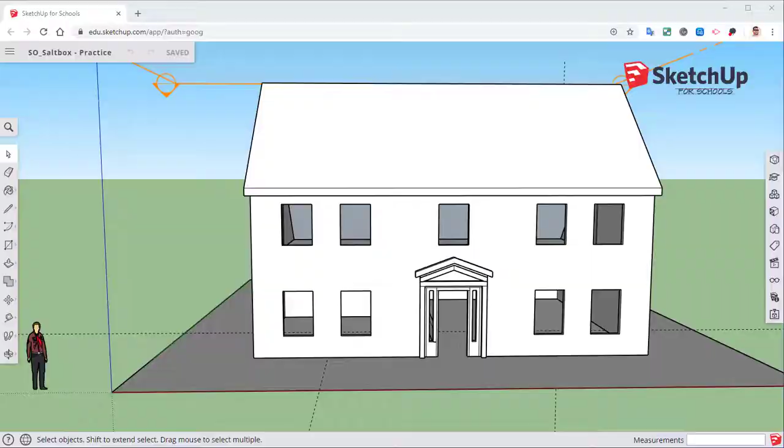Welcome back to our SketchUp for Schools project. We are still working on our Saltbox house. This is where we are currently at with our project. In our last video, we went in here and polished up the roof a little bit.

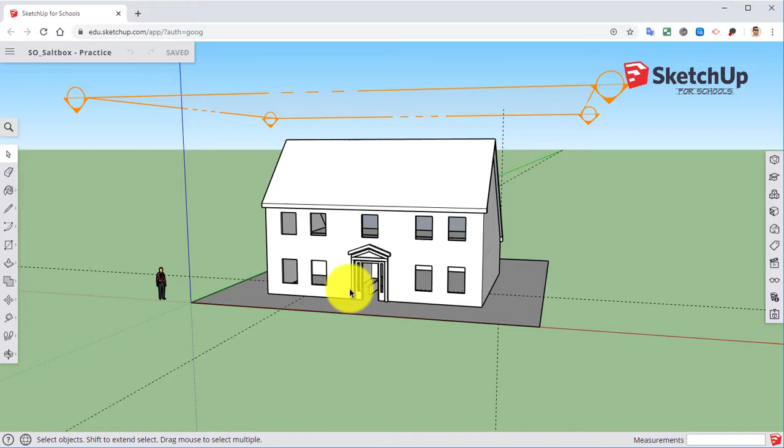We currently have our front door. However, we are missing two other doors, one over here on the side going into the mudroom behind the master suite, and then one in the very back that goes into the dining room, which is a big double door. That's what we're going to work on today.

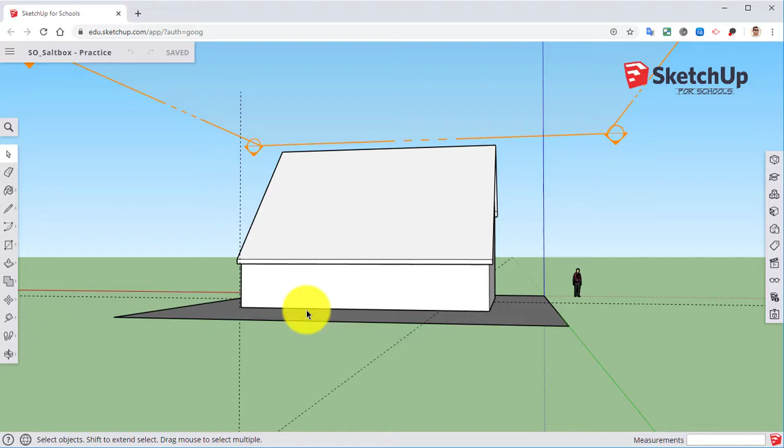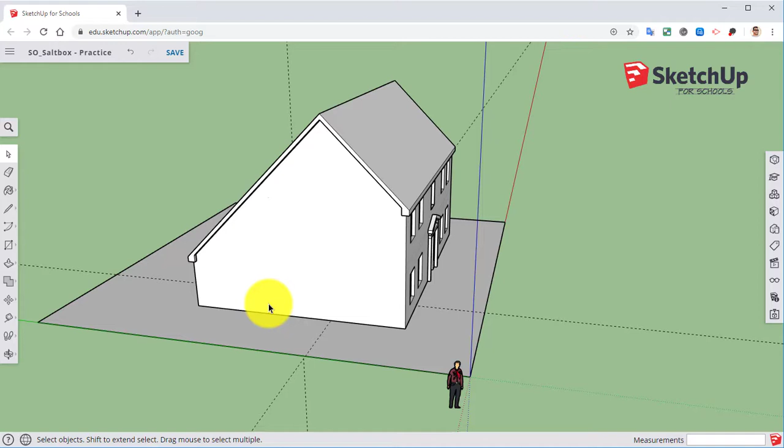I already have my measurement for the outside, but this house is very symmetric, and a lot of these doors are centered on the walls. If you need to do that on your own, you'd come in here with the section plane tool, create the section plane, push it through, and get the center for the door. I'll show you how to do that here in the back of the house.

But for over here, we're going to right click, edit component, and right click again. You see I have my dotted lines, or dots, so that way I know I'm actually inside this group or component, which is what we need to start with.

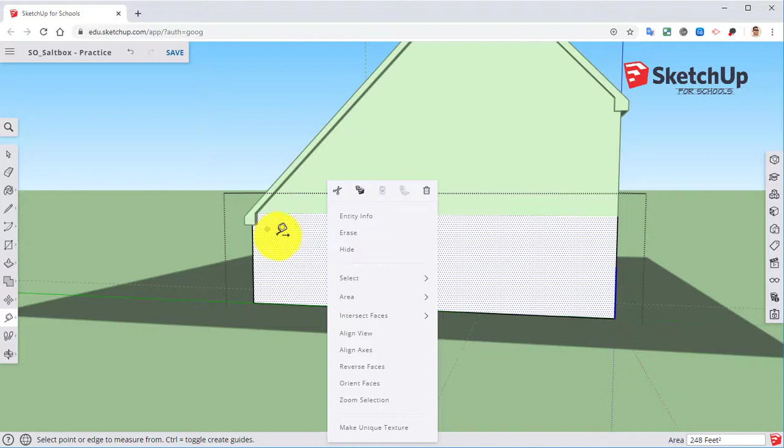I'm going to take my tape measure from the far left, go right, go 6 foot 1 inch. That's going to be the center of my door.

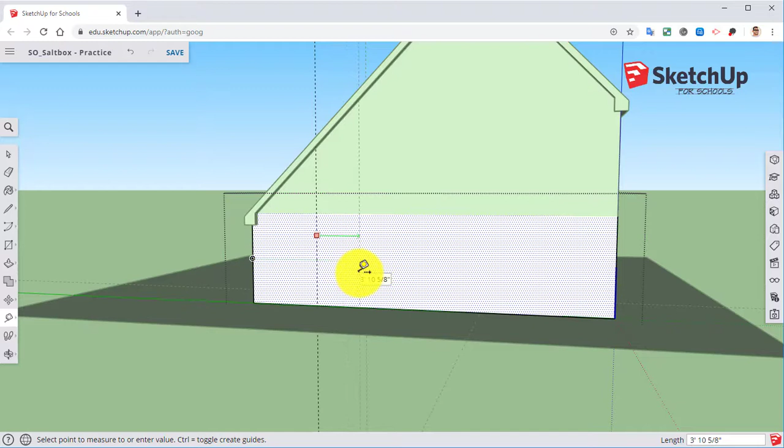This is just a 3 foot wide door, so I'm going to go from the center to the right, make sure that my line is green, type in 1 foot 6 inches, go from the other side. Make sure you don't drag it from the center, because it tends to glitch out for whatever reason.

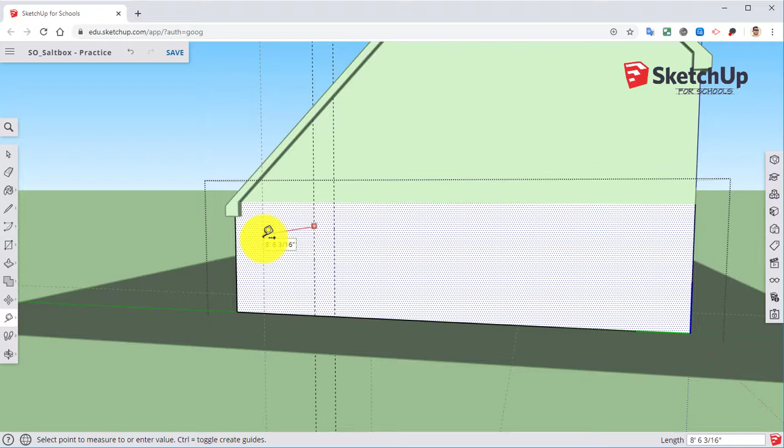It will not create a guide most of the time, so go up here, somewhere off the center, click, go, make sure it's again red. This is going towards me, so it's not going along the wall, be aware of that. Make sure it's green, 1 foot 6 inches.

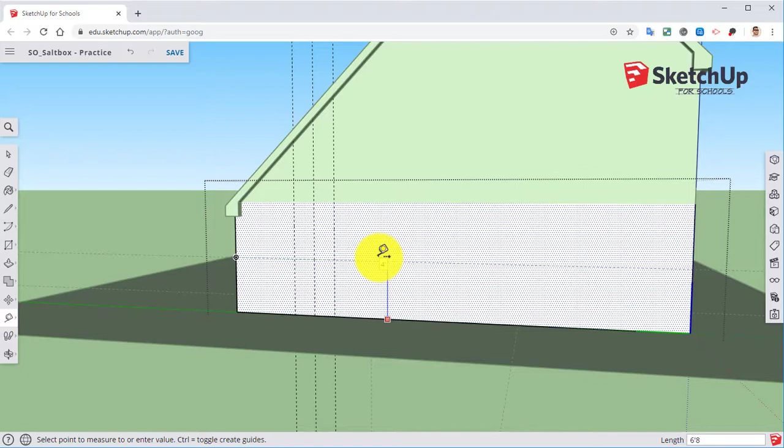Doors here, most of the time, go up to 6'8". That's the top of the door frame, or door opening. So I'm going to click bottom, go up, type in 6'8". That's also the top of our windows and everything like that, most of the time. Most of your windows are going to be lined up along the door.

The only outlier when it comes to door height is your front door. Sometimes on houses that have much larger ceilings, you'll have larger front doors, especially on giant houses with grand front entryways. You'll tend to have larger front doors, but other than that, most of the time you'll have 6'8" doors.

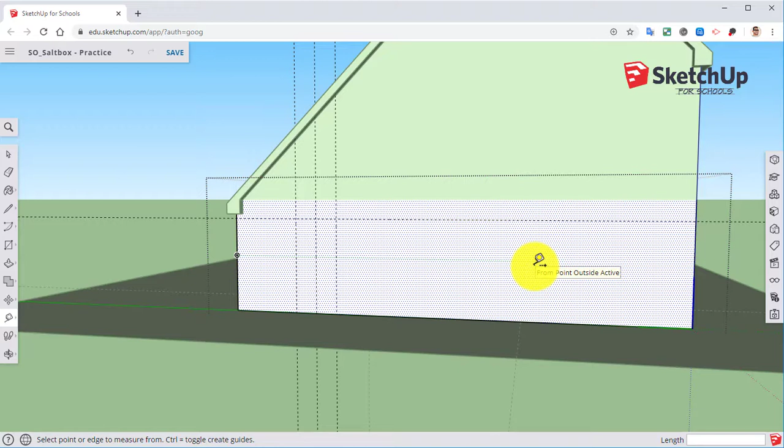So I marked off my door here. Take my rectangle tool, go from the top left down to the bottom right, push pull again. The tool kind of changes colors, click, and it should disappear.

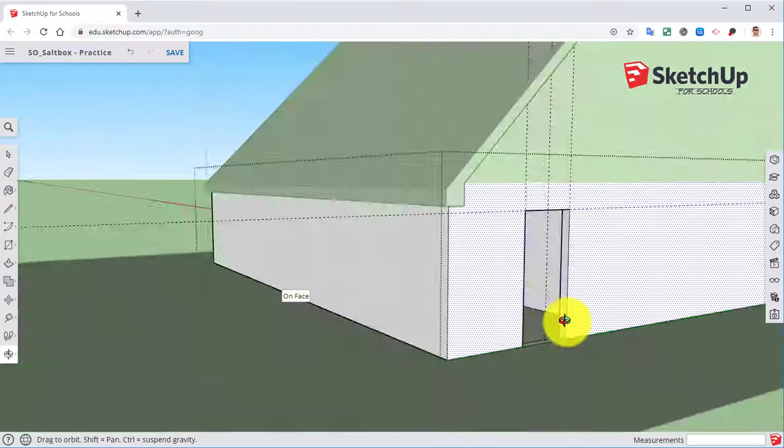On the back door, we're going to do it a little bit different. Going to take my section plane, go to the front, make sure that it's green, click. I'm actually going to get out of that. I'm going to right click, close group or close component.

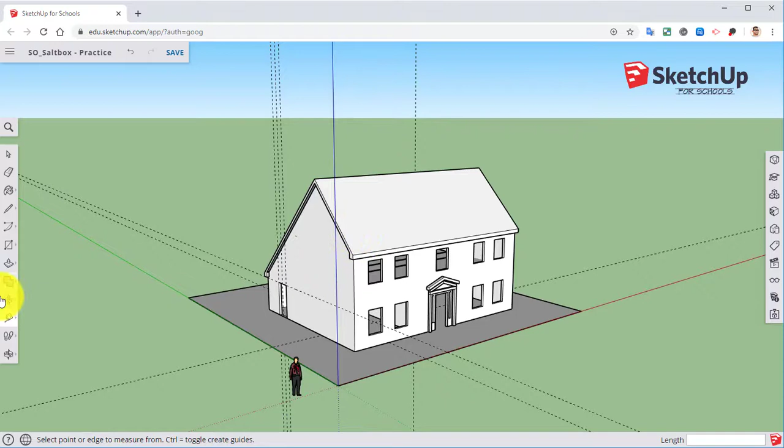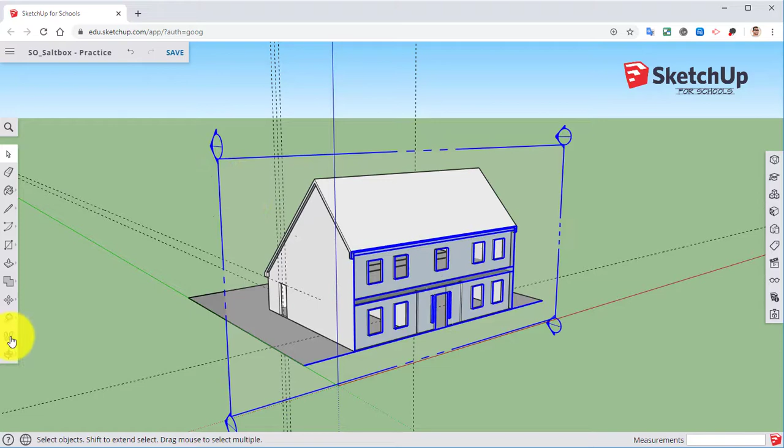Then I'm going to use it so that it's outside of all the groups and components, so that way it cuts through everything. As you saw a minute ago, I was inside that group or component, so it only cut that component. Just be aware of that if that happens.

Going to open up my display. I'm going to turn off my section plane so that it goes away. And we have the back inside of our house.

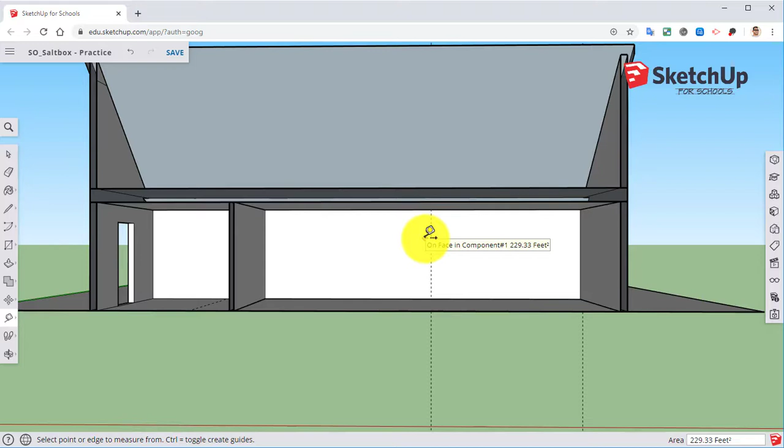Now this front room is 13 feet 6, so that's the width of this. There is a beam that will go through here, and it's for the support. It also mirrors what's in the very front. So there's a, if you watch my previous videos, there's a little 6 foot beam or 6-inch beam that goes in the very front of the house, matching these coordinates.

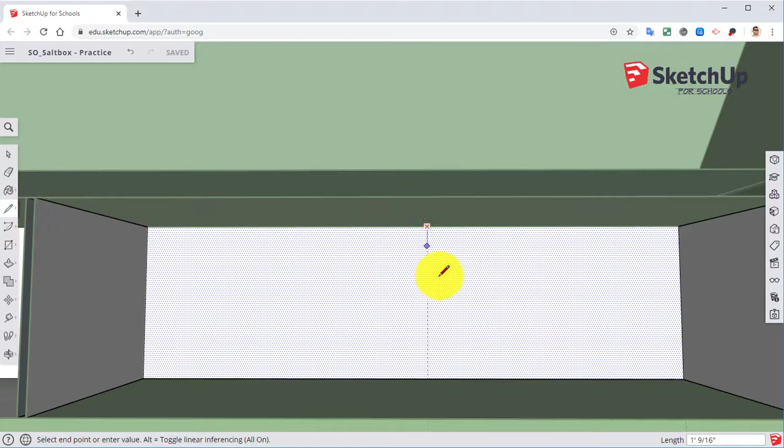So from here, right click, edit component, and get inside my wall here. I'm going to draw a line along this dashed line. The reason is, if I go in here and take my tape measure, it will not show up as a midpoint here because the midpoint is here. Along this wall, the midpoint's right here. However, if I come in here with my line tool, draw a line, that line has separated these two walls. So now my midpoint has shifted from here to now I have a midpoint along this side.

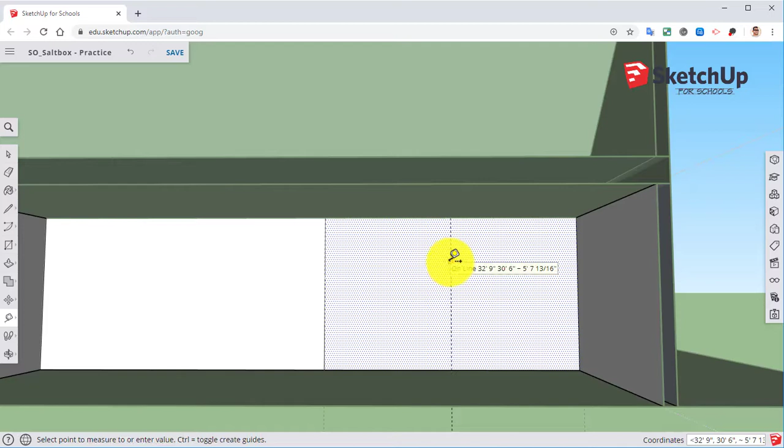So now this is my midpoint of my door and wall. And so this is going to be a double door. So I have a 3 foot wide door on one side, a 3 foot door on the left side. So click, drag to the right, type in 3 feet. Click here, type in 3 feet. And like always, it goes up 6'8".

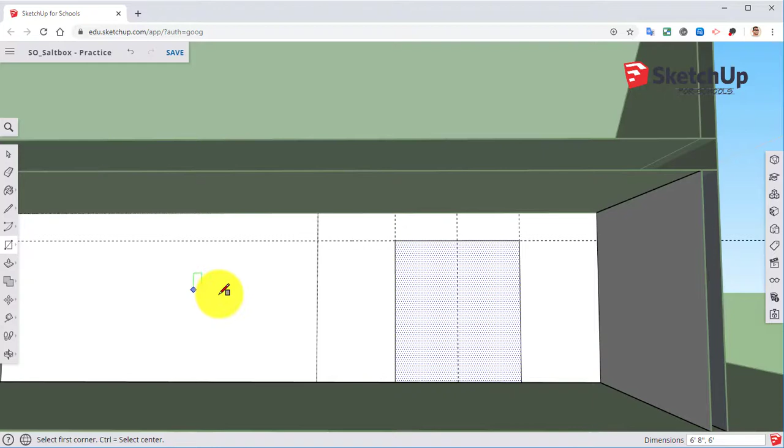I'm going to drag a rectangle along just over both so I create one large opening. Take my push-pull tool. I'm going to press down on the middle scroll wheel. Again, that is the keyboard shortcut for the orbit tool. So that way, when I release it, it goes back to the push-pull tool. So press it on that. Hold down on the shift in order to change it from the orbit to the pan.

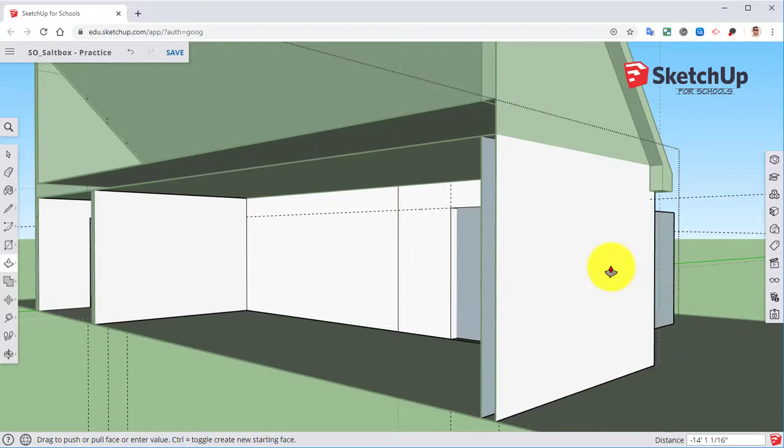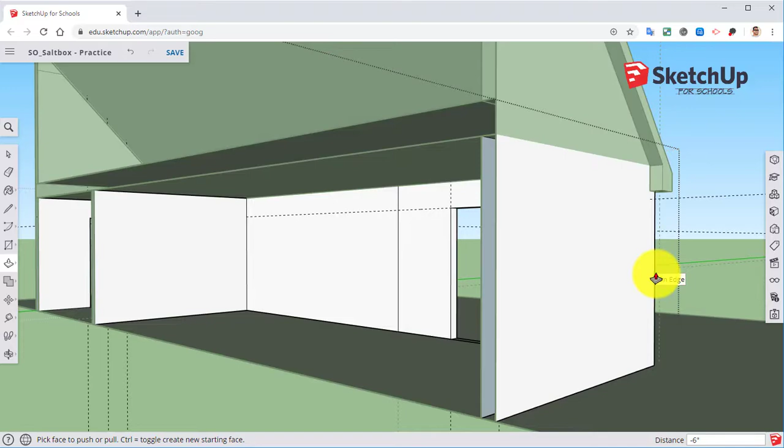I'm going to use the push-pull tool in order to push that through, and I'm going to hover my mouse over that edge of my wall here. Okay, that's inferencing. I'm inferencing that back edge. And so if I click, it pushes that wall from the inside, lines it with the back face. Once it does that, it disappears. So that is my back wall here.

I'm going to go ahead and clean up these two little lines. Same thing here. Go ahead and get rid of those. Right click, close component. Okay.

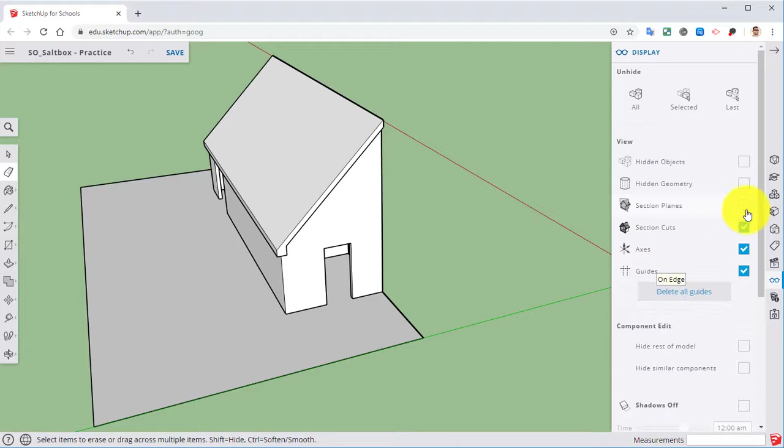I'm going to open up my display again. I'm going to delete all my guides. I'm going to turn back all my section plane. And I'm going to go ahead and delete that. So that I have that right there. I have my back wall and my side door.

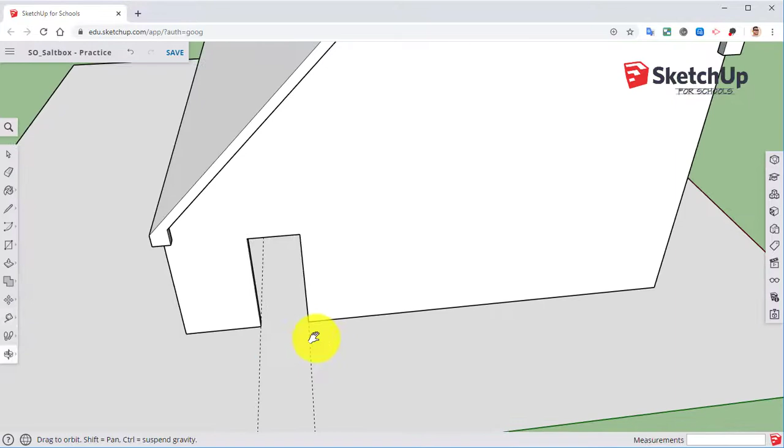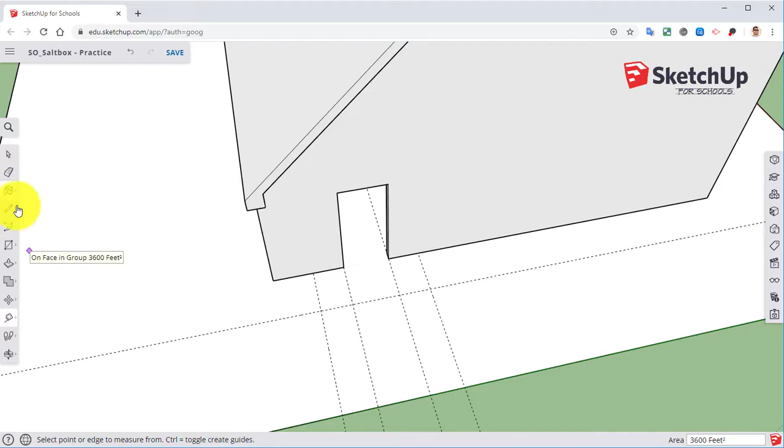Next, I'm going to come in here and create guides along this door. So over here, I'm going to go over 2 feet. I'm going to go over this way 2 feet. And I'm going to go 3 feet there. So this is going to be our patio. Take my rectangle tool. Create that.

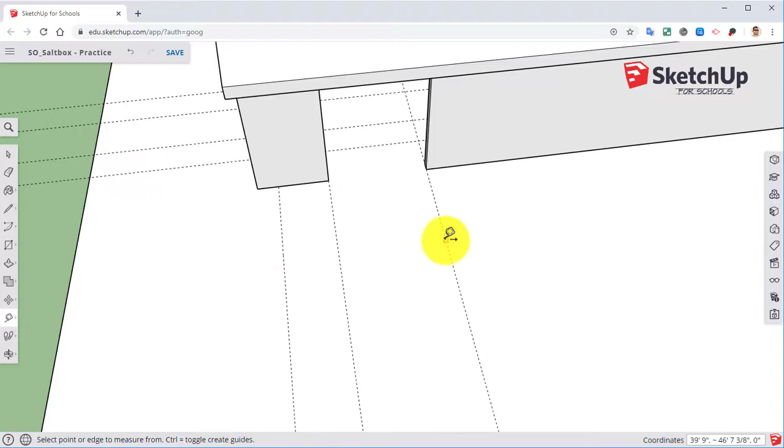Back here in the very back. Creating my guides. We'll go 3 feet on this side, 3 feet on this side, and let's go 5 feet back here. Connect my lines.

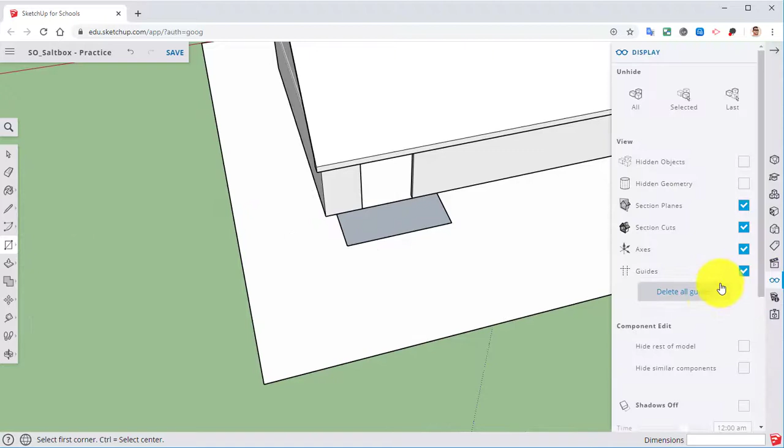Here, I'm going to delete my guides really quick. I then need to unlock, because I locked it previously. I'm going to unlock that. Then I'm going to delete it. Then I'm going to take my push-pull tool, and I'm going to pull down patio 6 inches.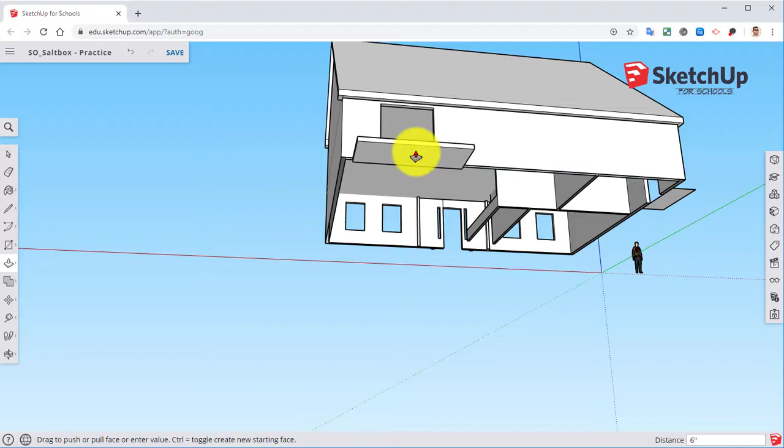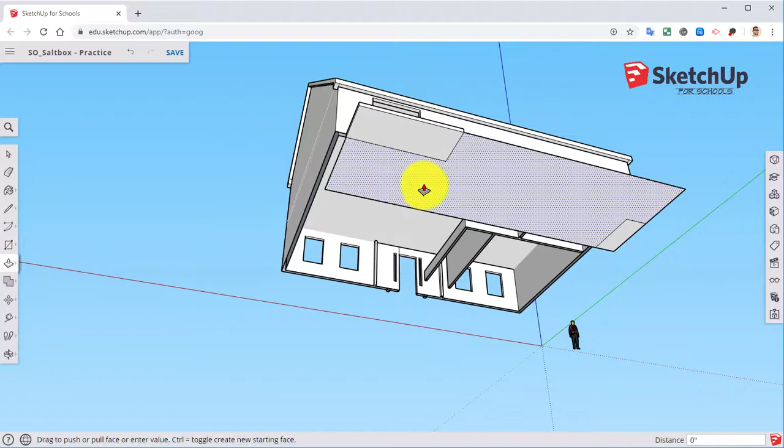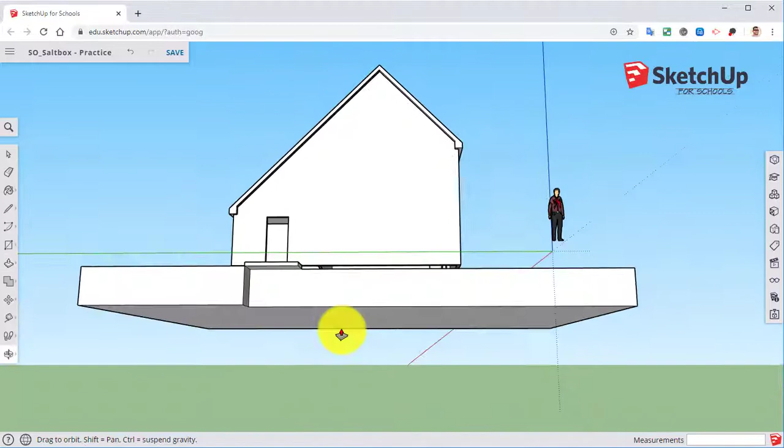And from this point, I'm going to take my rectangle tool, connect those 2 endpoints. Going to pull this down 5 feet, something to make it easy. We'll clean up these right here, and I'm going to use this in order to create kind of our land. Just cleaning everything up. Right click, reverse face.

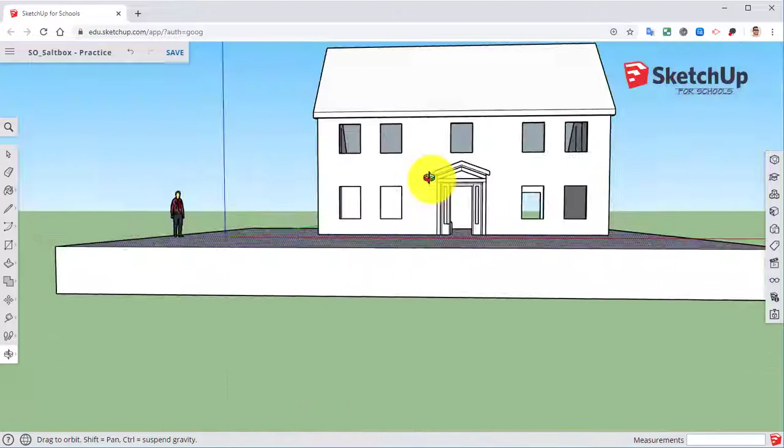All right. Let's triple click on this so that it selects everything. Right click, make it a component.

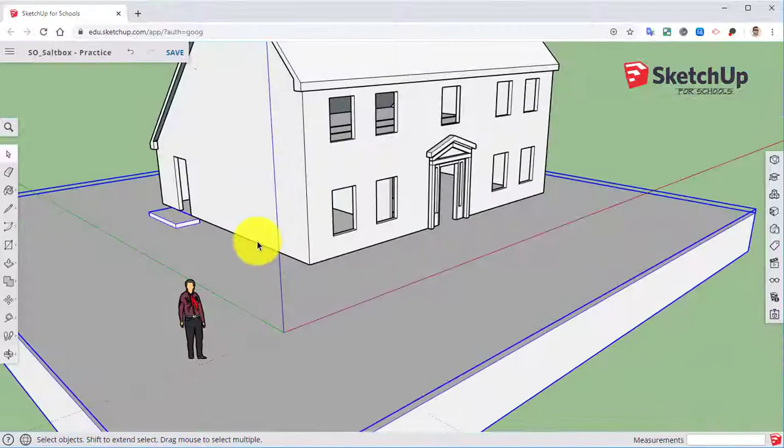Okay, we do need to fix the floor and everything, as I currently don't have one. And because I lowered everything down, now I have a small little 6-inch gap underneath my house. But we'll fix that in our next video.

So this is what you should have. Make sure you take a screenshot showing this back side of the house here. Make sure that I can see everything that you did.